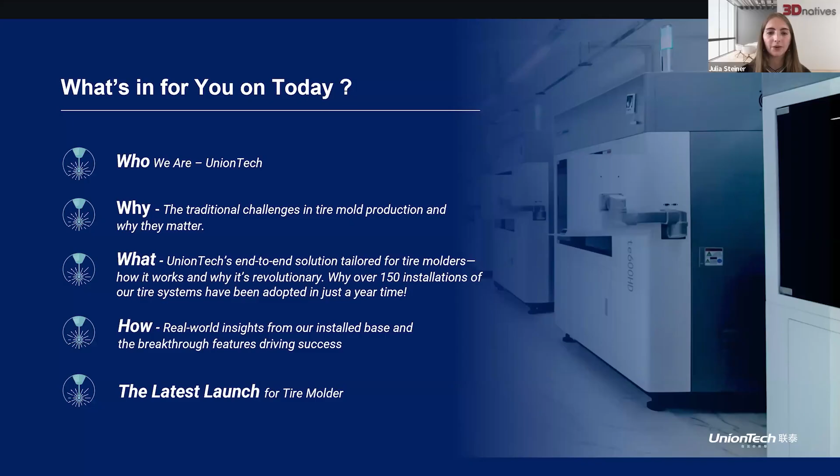And yes, before I pass it to Stanley, I want to give a quick overview of the tire market. This graphic here specifically just is illustrating the automotive tire market global forecast to 2028 in USD. So the CAGR up until 2028 is expected to grow 2.1%, up to 21.6 billion by 2030. So you can see there's just a nice steady growth and demand for automotive tires across the world.

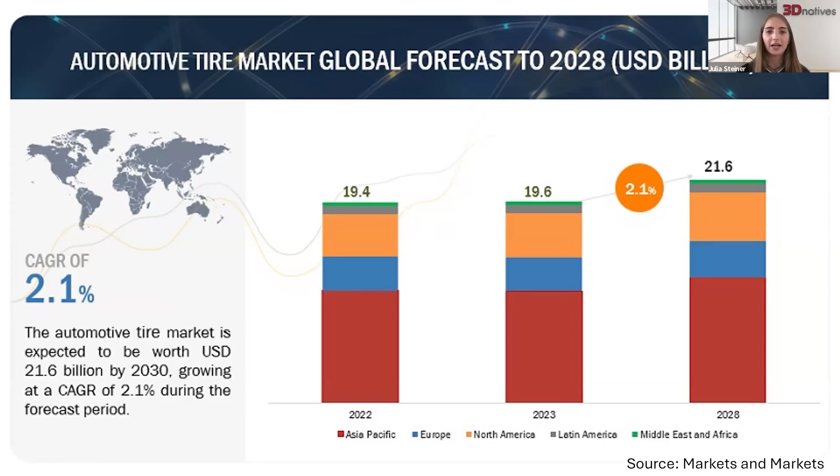And Stanley, you could continue. Thank you. Another thing that's important to think about here is one of the reasons that there's such a high demand for tires is it's not just that people need tires generally. There's very specific needs for tires given different kinds of vehicles, different kinds of weather. And this illustration also just shows it's scraping the surface of the diversity of tires that are out there, but generally there's asymmetric and symmetric tire design. And within those subsets, there's non-directional and directional. But again, there's so many different kinds of tires out there with unique treads that are fabricated to meet specific needs. And so today, Stanley will be diving into how 3D printing technology is helping tire mold manufacturers achieve those demands.

So before I pass this to Stanley, I'll just quickly go over these poll results. Thank you for answering those. So for the first question, it looks like 11% of you are coming from the tire production industry, 4% from automotive, and the vast majority of you, 85%, are other, so not coming from an automotive background. And out of the people who answered question 2, 57% of you have used resin 3D printing already, 43% haven't, so a good mix of people with experience. And then out of the resin technologies that you all have used, 48% of you have used SLA 3D printing before, 28% DLP, and the rest have not 3D printed with resin.

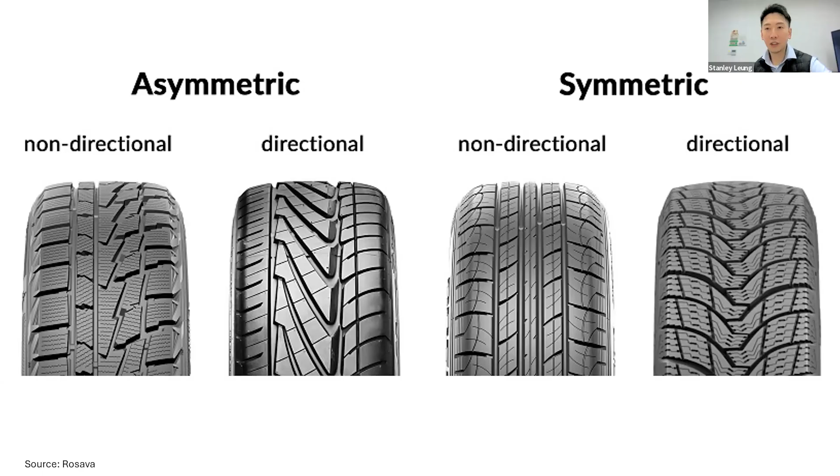And also thank you so much for sharing the statistic and data of the tire market growth to 2028.

Now let me share a little bit of background about us at UnionTech. We are a global additive manufacturing solution provider with over 25 years of experience. UnionTech's mission is to bridge distributed manufacturing and mass customization across industries. A lot of users these days using UnionTech machines are coming from a manufacturing background. We have shipped over 15,000 printers worldwide, backed up by a team of over 150 engineers and scientists.

And also we have partnered with over 60 reseller distributors across the world. With all this, we are able to position ourselves to deliver reliable and innovative solutions to serve our customers, our VIP customers in the world.

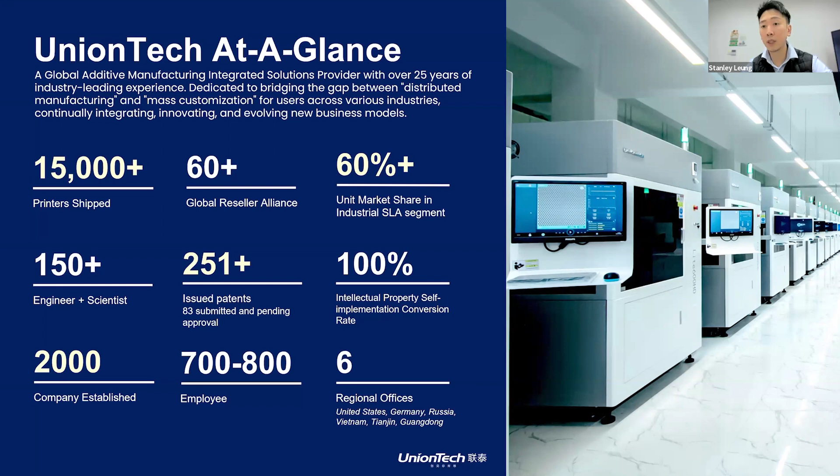What sets us apart is our all-round ecosystem. We don't just deliver hardware. We provide a one-stop additive manufacturing solution covering hardware, software, materials, and on-demand printing service. Our core includes R&D and sales of industrial grade 3D printing equipment, but we also own our material subsidiary company called Synthetic for material development, pushing the boundary of materials in order to meet and create a solution for niche applications as well.

And it's not just about material and hardware. Unionfab is a subsidiary company we own in China to offer manufacturing on-demand service for those customers who want to leverage 3D printing into their business but don't know how to do it, or don't want to own the machine, but want to outsource it and generate value for their business.

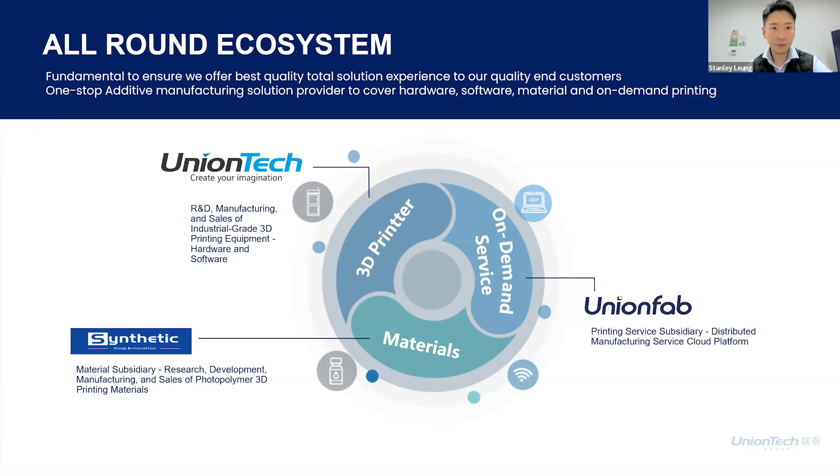When we look into our flagship product portfolio, we're focusing mainly on ultra precision SLA technology. We have a full range to match our customers' needs, including the entry level Lite Pilot series, and our iconic Lite 2.0 version, which is very popular and famous for the service bureau market.

We also have our manufacturing grade machines, including the RA series for footwear, for tire, and for automotive. For customers looking for extra large format machines like the 1400, 1800, or 2100, this machine comes with dual and triple laser for the best ROI. All these machines are fully tuned for speed, reliability, and top-notch production purposes.

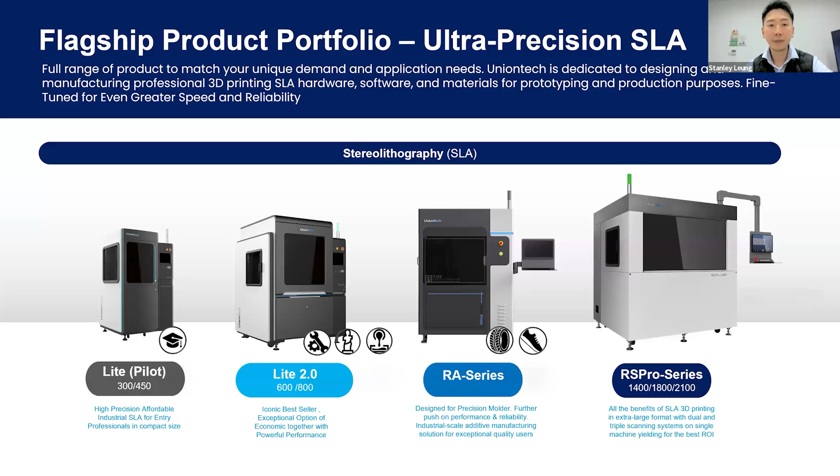And today, we are going to focus on the patterns on wheels, and we are going to share more about how we are reshaping tire mold fabrication.

Before we go into the details, I want to share some context, some background about why UnionTech is putting our effort in this area and why UnionTech has been so successful in this area in just one or two years' time. We have listened closely to tire molders, including Michelin, Goodyear, and so on. And here's the challenge we have heard loud and clear.

First of all, they're facing very intensive market pressure as the number of vehicles developed and the automotive industry grows, and they have a higher demand on tire performance. As a result, tire market design and tire iteration become more rigorous and fierce. And when we speak about the tire, it's not just about overall performance, it's related to safety.

And when we speak about safety, the tire tread design is key to the overall performance. And mold precision is also very critical because it relates to tire accuracy, quality, safety, and comfortability. But designs are evolving fast, bringing heightening technical hurdles.

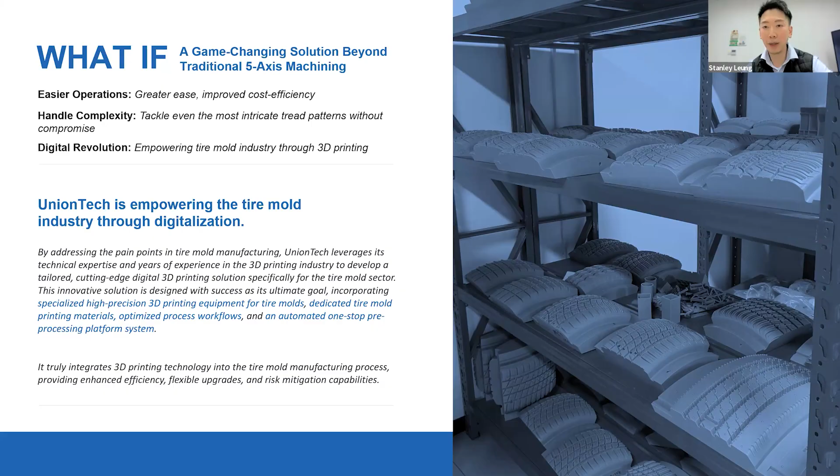Before we go into the detail of our product, our solution, let's learn a little bit more about the traditional manufacturing process for making the tire mold.

First of all, they need to get the data, and after they get the data, they have to build what we call the master patterns through the data, including the CNC process, and then they will need to add the steel blade manually onto the master mold in order to form a complete, ready-to-use master pattern for the casting process.

This means they require machining time, machining CAD/CAM programming effort, and afterward they need additional weeks to insert one by one the steel blades onto the master mold. This usually takes about 2 to 4 weeks to get a ready-to-go master pattern for the casting.

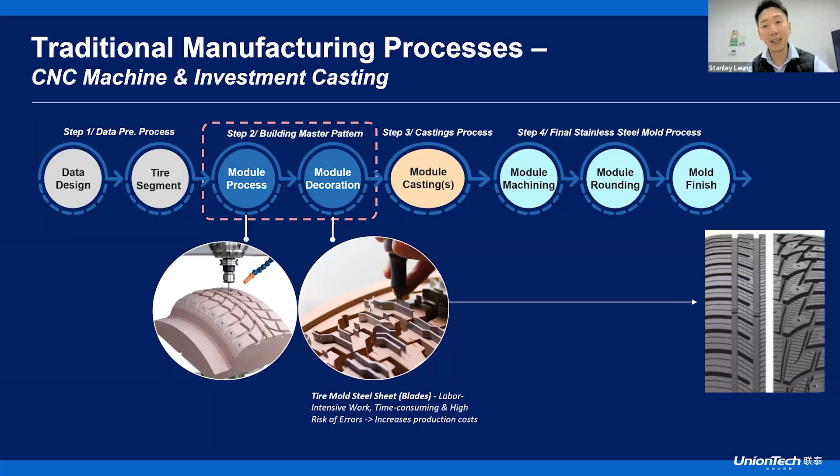What if we are now able to build the complete mold with our SLA technology for the base mold, together with the steel blades, in one go? Then it will help them save 80% of the time and also greatly improve cost efficiency for the entire process. And that is where we come in.

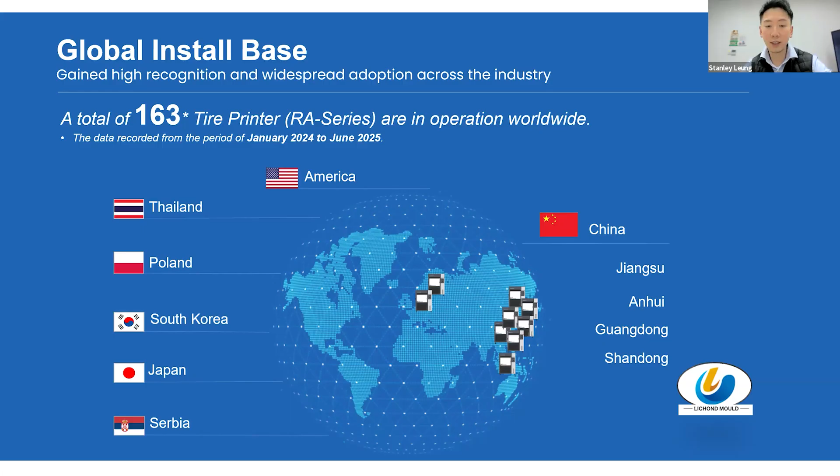Right now, we have over 163 tire printers from our RA series in operation worldwide. This is a record from January 2024 to June 2025. They are running in places like Thailand, Poland, South Korea, Japan, and also various provinces in China, such as Jiangsu, Anhui, and Guangdong. This widespread adoption shows the high recognition of our solutions across the industry.

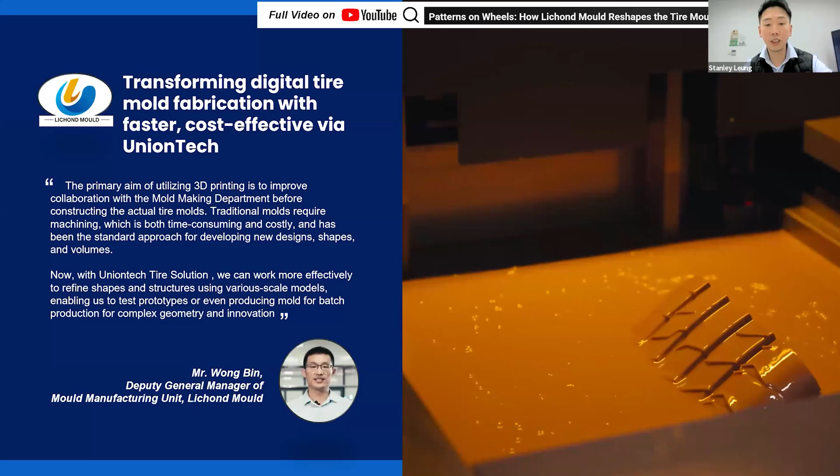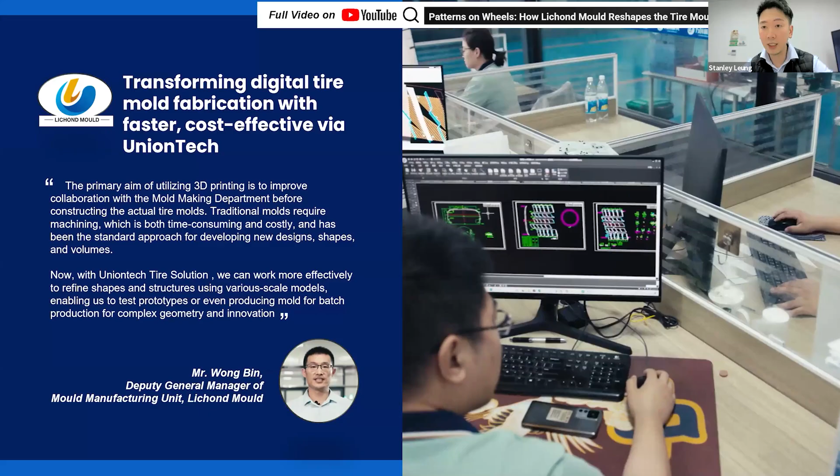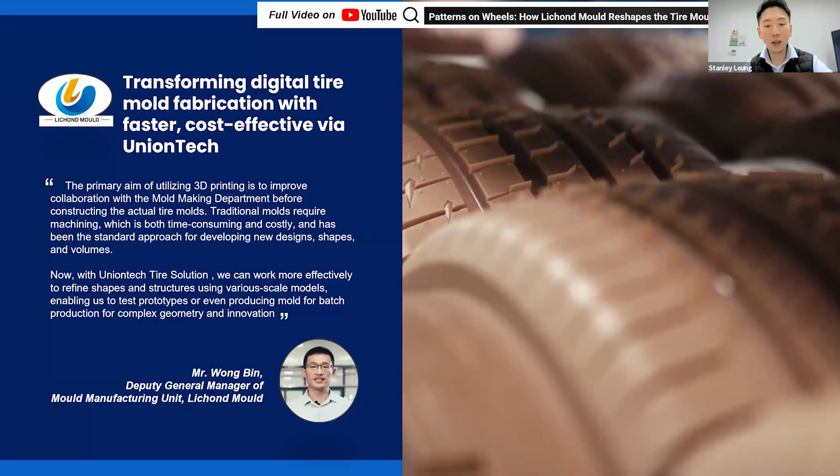Here is a real-world insight from Mr. Wong, general manager of mold manufacturing at Lichond Mould. They own more than 20 units of our RA series for tire mold production. They mentioned that the adoption of our technology helped them improve operation efficiency by 25% from a time perspective, and helped them save 45 to 50% on the cost of making high-complexity master patterns for the tire mold.

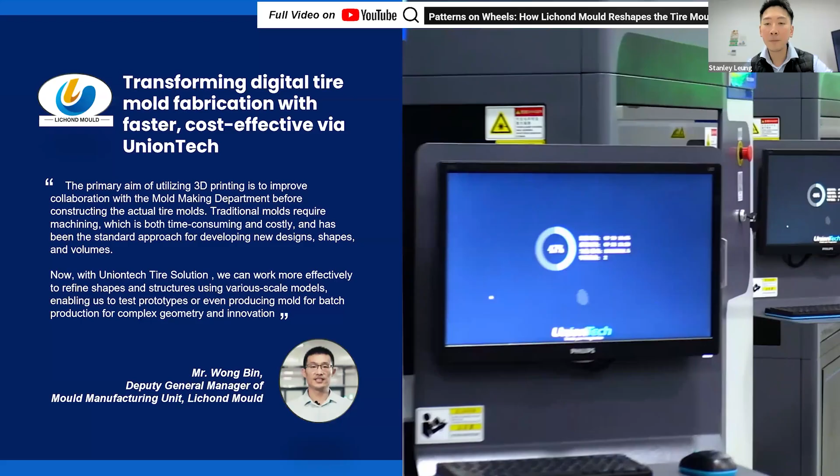For the full video, you can watch the full link here on YouTube, and it shows you the entire background about Lichond Mould and how they are leveraging and commenting on the UnionTech tire mold solution system.

So we have explored the challenges faced by tire mold manufacturers and the limitations of traditional machining methods, and how UnionTech's RA solution is revolutionizing the tire mold industry, as well as the installation volume so far.

But what does all of this mean for the tire mold maker? And what are we offering to them? What is the ultimate value they care about? Here is what we are going to disclose more.

First of all, we are providing an end-to-end total solution to enhance their manufacturing excellence. What they care about is not the machine specification, but the end result of the printed part. And this benefit is not just theoretical - it has been proven by real-world applications and is already driving tangible results for our customers.

What they really care about is four things. First of all, it's about quality and repeatability, the most critical aspect of tire mold production. All tire manufacturers rely on precise molds to produce tires with uniform tread patterns, optimal grip, and consistent performance. Our solution has the capability to eliminate all variability and ensure that each mold meets exact specifications. So we are very confident about the quality and repeatability.

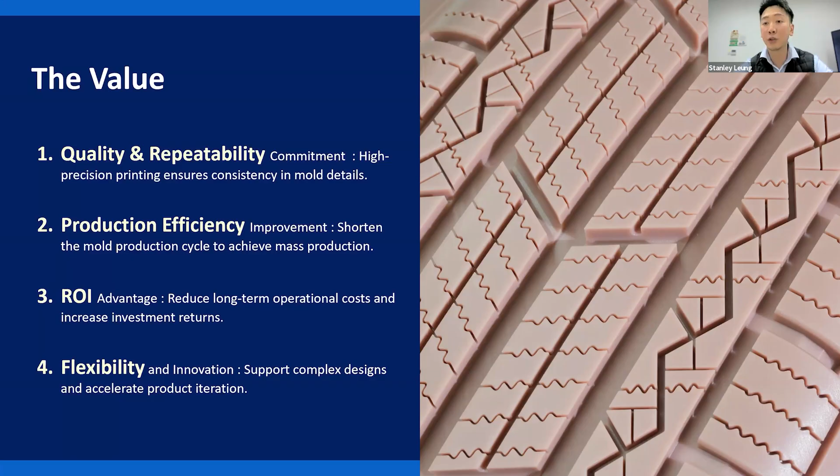So let us cover it one by one. I believe quality and repeatability is one of the most important standards for the tire molder, because they see this machine not as a prototyping machine, and the part they expect to print is not a prototype or one-time model. It's a manufacturing aid. The better the part they can print, the better the final mold they can fabricate.

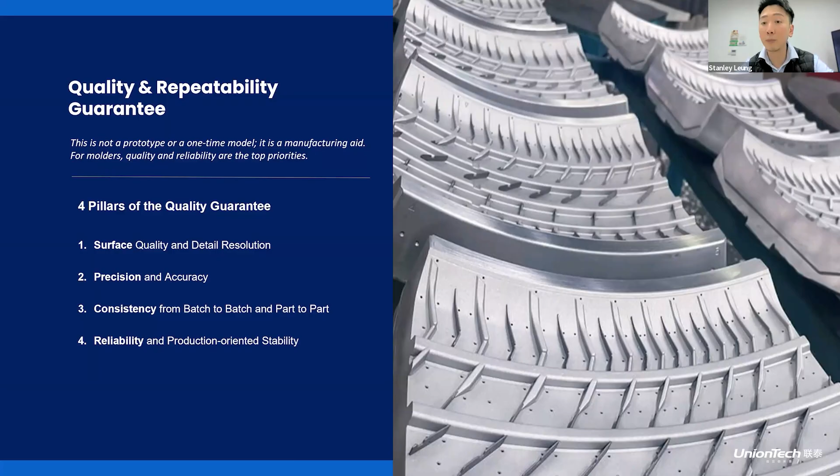So when we look into the quality for tire molder models, they care about the surface quality, they care about the precision and accuracy, they care about the consistency from batch to batch, as well as the reliability and the stability.

First of all, it's about the surface finishing. Surface finishing is very important, and we deliver a superior surface finish with RA value of no more than 3.5 micron, which is exceptionally smooth. A low RA value ensures the tire mold surface is free from imperfections, reducing the need for post-processing or polishing. This not only saves time but also maintains a high integrity of the mold design.

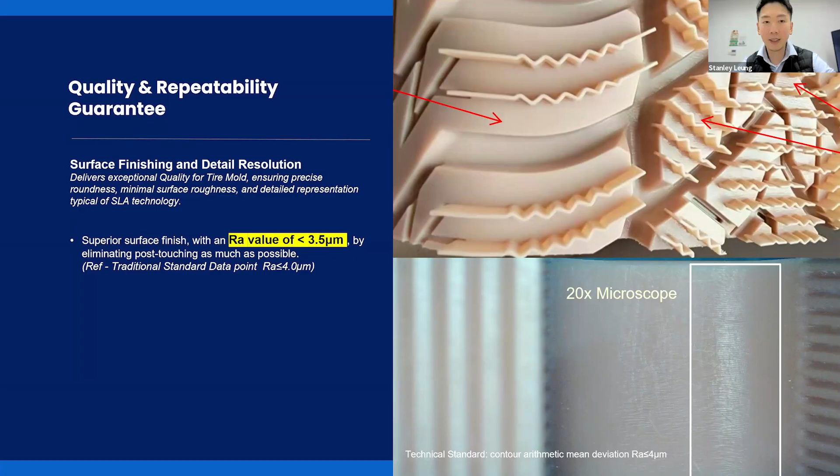So we can ensure the outcome of the print mold from our machine is free from step lines, with an outstanding surface finish.

The second one is about the roundness deviation. Our printer can achieve unparalleled precision with a roundness deviation of just 0.03mm across any cross section of the mold. This ensures the mold maintains perfect seal, which is essential for tire manufacturing because they need to assemble at least 8 or 9 pieces to form a complete tire mold for final production. So roundness is a very essential criteria to make the final mold a perfect seal.

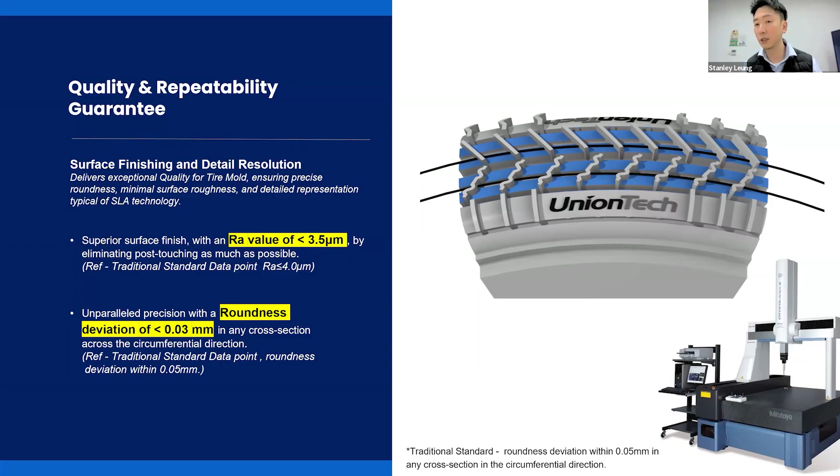So we guarantee surface finishing with an RA value less than 3.5 micron and roundness deviation below 0.03mm. Beyond surface finishing and roundness, precision and accuracy are at the core of our commitment to delivering high-quality tire molds. There are three categories when speaking of precision and accuracy.

The first one is about the tread point deviation. Our RA series printer uses advanced optics and motion control systems to ensure that over 90% of the tread points have a deviation within 0.08. This level of precision ensures that the tread pattern is accurately replicated, leading to consistent tire performance.

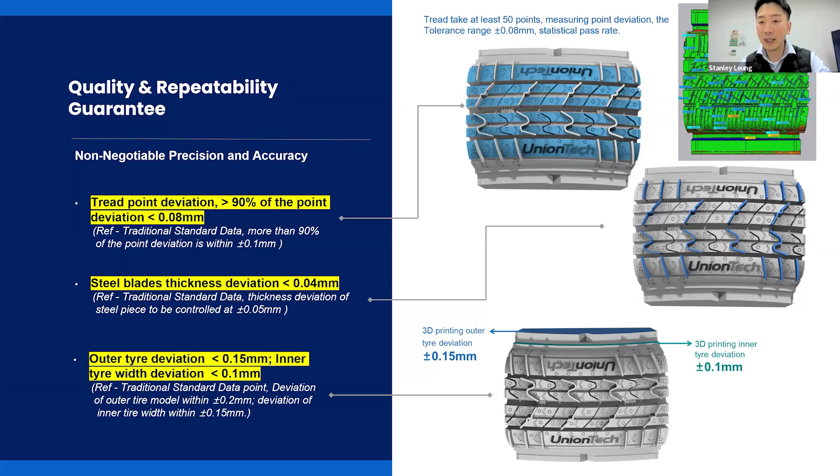For the steel blade, we are committed to delivering a deviation below 0.04mm. As well, the outer tire deviation and inner tire width deviation are managed within 0.15 and 0.1mm. All these numbers are even better than their traditional machining process. So parts coming out from our RA series are able to deliver excellent surface quality, roundness, and dimensional accuracy.

The next topic is about consistency. They don't see this machine as a one-time modeling machine, but expect it to keep running 24/7, 365 days non-stop. It's a continuous production machine. So they would expect good consistency from machine to machine, from batch to batch, from corner to corner.

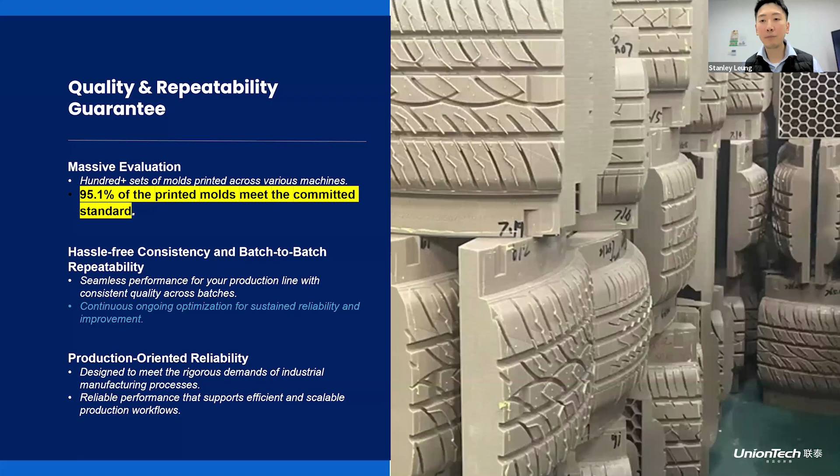We run massive evaluation before we launch the product to the market, and we have recorded that 95.1% of the print molds are able to meet the committed standard. We are speaking to the public - it's not perfect yet, but it's an ongoing journey, improving the formula of the material and improving the algorithm. 95.1% is a very proud result for the manufacturing solutions, for those tire molders.

So what are the elements included in this RA solution, or tire molder manufacturing system?

It comes with three ingredients, or three essential components. First of all, the RA600 is the backbone of our solution. It provides the hardware needed to produce high quality tire molds more efficiently, specifically tailored for tire mold production. It combines high precision, high speed, and reliability to deliver exceptional results.

The second ingredient is our resin, specially formulated for tire applications. And the last one is the software. Our software is not just a simple data preparation software.

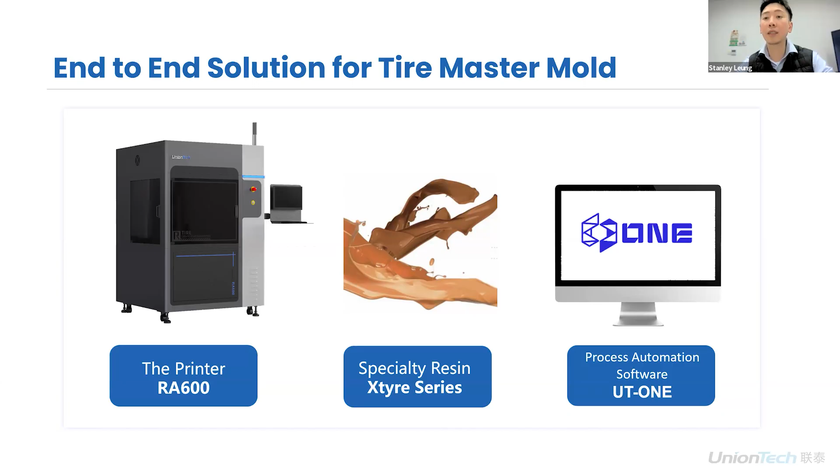It's an AI, artificial intelligence software which allows the user to do the job in one click, reducing all the learning cycle and enhancing the parameter setting for printing tire mold. Let me go into each of them one by one.

From the hardware perspective, our technology advantage shines through. The designated dynamic switch optical scanning system allows a seamless switch between different laser spots for precision. When we print a part in a single layer, we use a thinner spot for the boundary area, then switch to a wider or thicker spot for the inner area. This keeps a good surface finish without delaying or extending the printing time.

Not just the dynamic switch optical scanning system, but also the automatic calibrations on our RA series. It reduces all the manual intervention required during calibration, improving calibration efficiency and uniformity performance from machine to machine, because the calibration relies on machine control instead of human control. Last but not least is our micron level liquid control system.

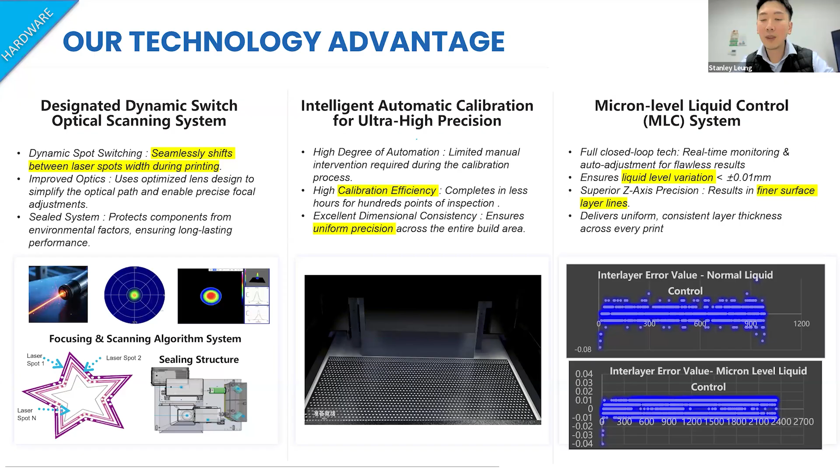Our micron level liquid control system uses a full closed loop tech for real-time monitoring, keeping liquid variation within 0.01 mm. Because of that, it produces very uniform layers and smooth surface quality across the printed part.

For the material, our Xtyre resin are not just a material, they are engineered solutions designed to meet the specific needs of tire mold production. We tuned the viscosity, we tuned the accuracy, and also we tuned the light absorption range, so as to ensure the Xtyre resin can deliver outstanding quality results with very consistent and reliable performance across time.

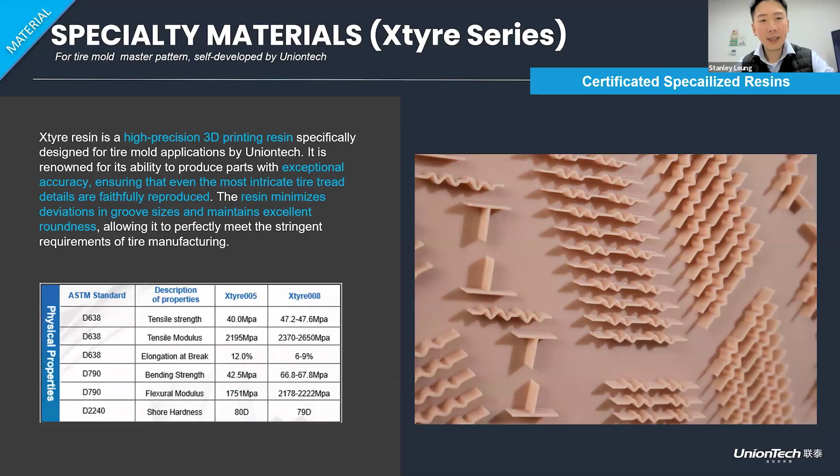Last but not least is the UT-ONE. The UT-ONE Tire Modulus is an automation data preparation engine bundled together with our RA machines. It allows the user to just import the data, and the rest of the work, including data repairment, placement, generating the lattice structure inside, and creating the hollowed structure, is completed automatically by the software.

Thanks to this, the operator doesn't need to learn all the knowledge of what is the best orientation, or what's the appropriate angle for printing the mold in the best quality way or highest success rate. All the configuration is already preset inside the UT-ONE, and the worker just needs to click once, and the software will base on a large language model to adjust the best orientation configuration and complete the work.

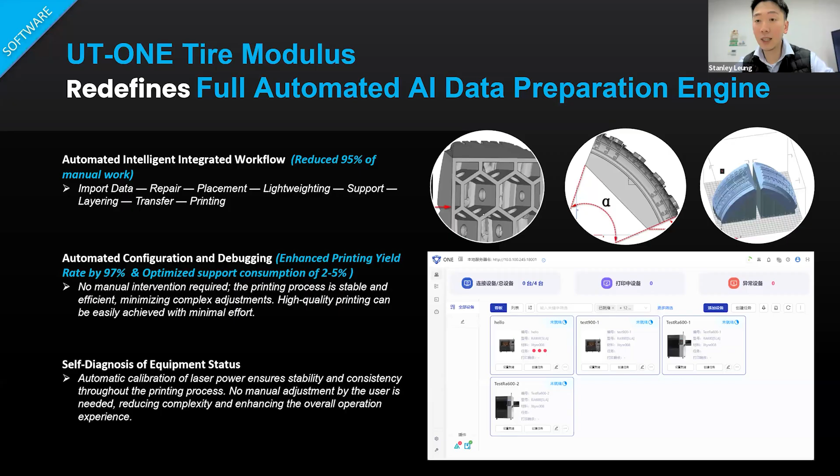So it reduced manual work, reduced the learning cycle, and also enhanced the yield rate and reduced support consumption across multiple angles.

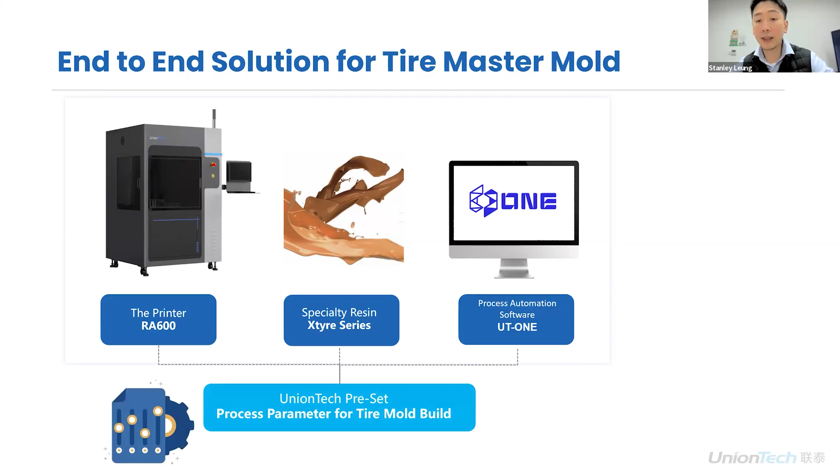So as we mentioned, we have the RA machine hardware, we have the material and the software, and together with our preset process parameters, we have the confidence and competency to guarantee our quality meets the market standard. This end-to-end setup ensures reliable and high performance for the tire master pattern mold.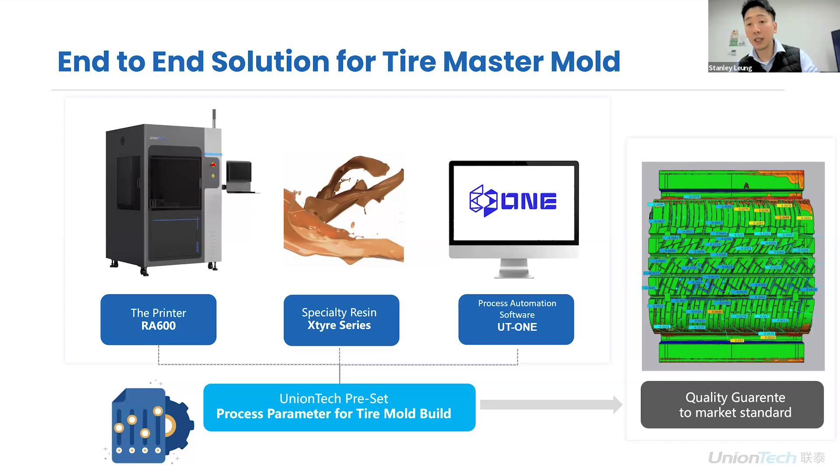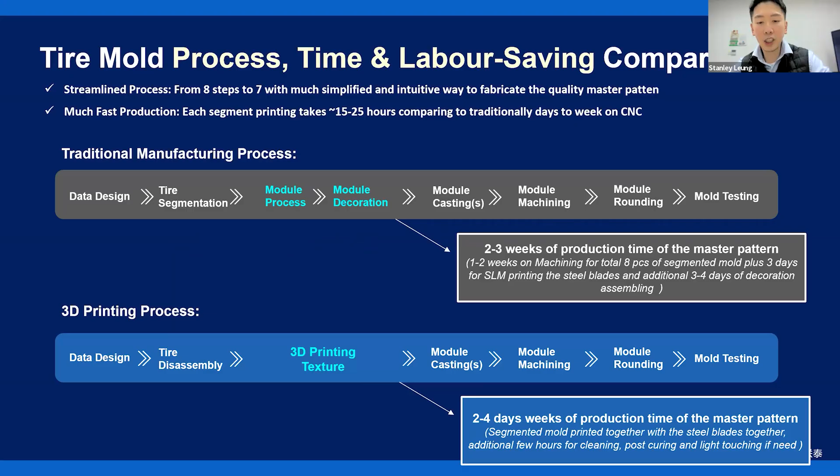So let's look into the ROI and productivity, as well as the comparisons. Here's a quick comparison between the traditional process and the 3D printing process.

If we do the traditional process, it would take about 8 steps, with the majority of time spent preparing the master pattern, because it involves the machining process and requires inserting the steel blade into the base mold manually. It would take roughly 2 to 3 weeks to complete a fully ready to use master pattern.

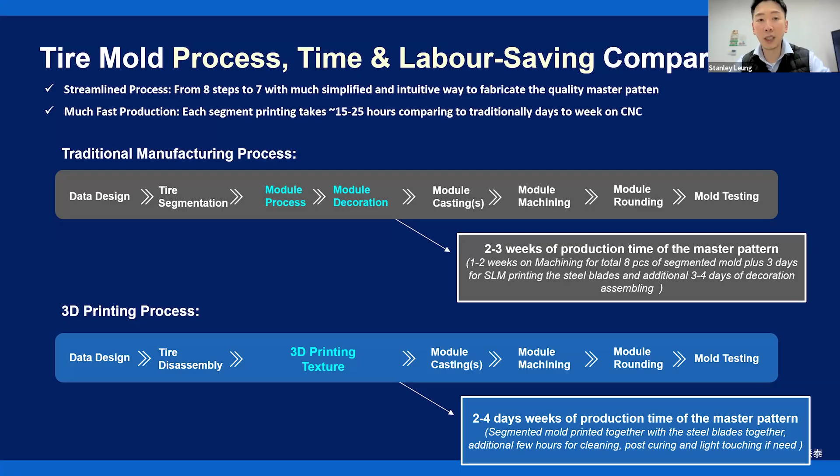But now with our 3D printing methodology, we're able to reduce the steps from 8 to 7, with a much simplified and intuitive way to create quality master patterns. It would take only 2 to 4 days instead of 2 to 3 weeks, getting one segment of the master mold printed with our RA series machines.

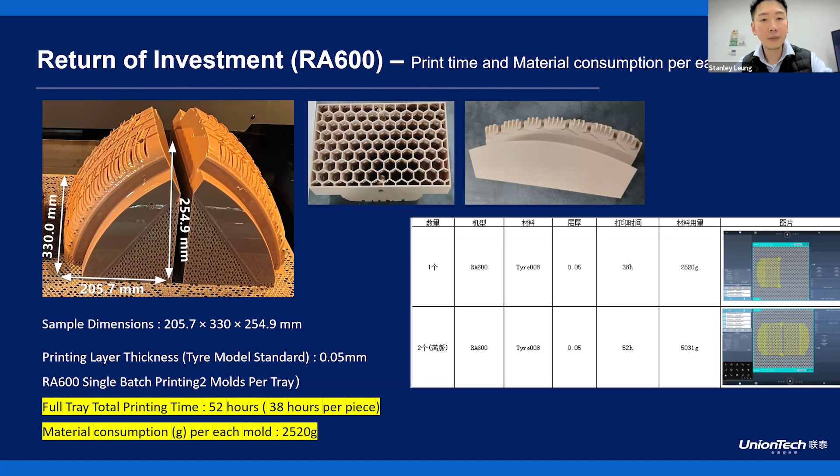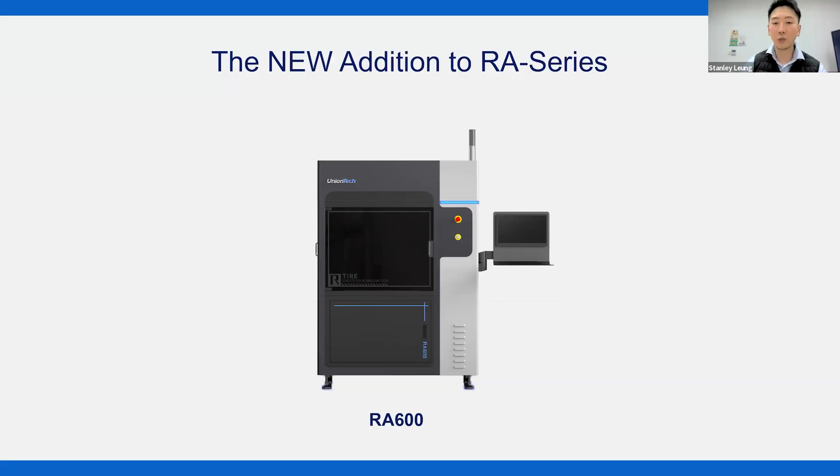Let us share some great news about our new product launch in the RA series. Starting from Q3, we officially launched our new RA product line on top of the RA600, which is our RA900. This is a bigger and more powerful machine, a good fit for large or medium-sized tire manufacturers who care about productivity, time saving, and want to push the quality boundary beyond the RA600.

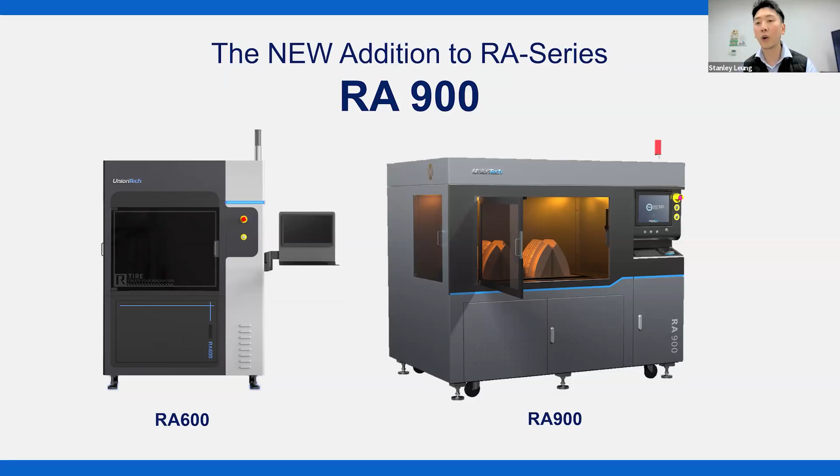There are different upgrades on the RA900 comparing to the 600. The RA600 features high efficient production with a single laser, while the RA900 is a dual laser machine, meaning higher efficiency in production, with the laser also featuring a variable spot.

On top of the dual laser, it comes with auto resin fill and is able to print 4 molds simultaneously at high-speed output. Beyond the dual laser, we've improved and designed a new recoater to enhance the liquid control system, and added automatic door lock systems for better safety.

We can discuss more technical details offline if you're interested in the RA900. But looking at the productivity, it's very clear there's improved productivity from the 600 to the 900.

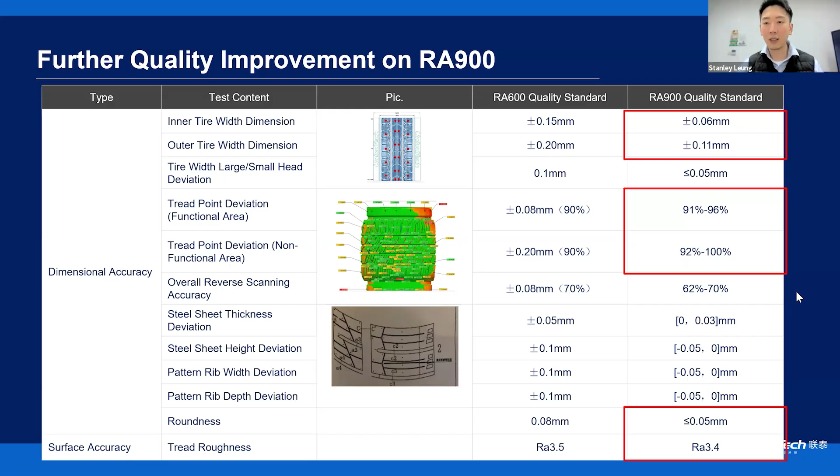Right now we have over 161 installations around the world, and customers are very happy with the results. We are expanding this solution to more tire molder companies.

In the end, what we're offering is not just a single hardware or material, but a total end-to-end solution, giving a guarantee of success on quality, repeatability, and ROI advancement through our RA series solutions. That's what we aim to generate value for manufacturers.

That's all I'm sharing today, and I hope you find the information valuable.

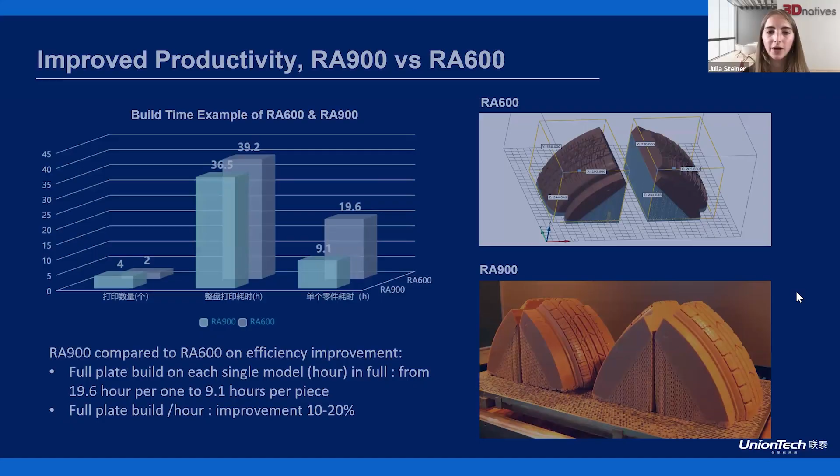But yes, okay, I will ask another question. With automated workflows using AI, how does the automated intelligent workflow achieve a 95% reduction in manual work? And what tasks still require human intervention? That's a good question.

Usually the most challenging part on using 3D printing, or for the operator level using 3D printing, is they need to learn the knowledge, learn what is the right orientation to place the part for printing, and how to generate the hollow structure. What's the wall thickness of the hollow structure, or which wall is creating the best result? And what is the lattice structure? What's the size of the shell preferred for printing the part? So learning this knowledge is a pain.

Our software is built to eliminate all this learning cycle, because when the user imports their STL data into our UT1, and instructs the UT1 software that I'm going to print the tire mold, the software will, based on the shape, the curve, the size of the mold, automatically generate the hollow structure, generate the lattice structure, generate the support, and adjust the orientation and angle. All this knowledge is not required for the operator.